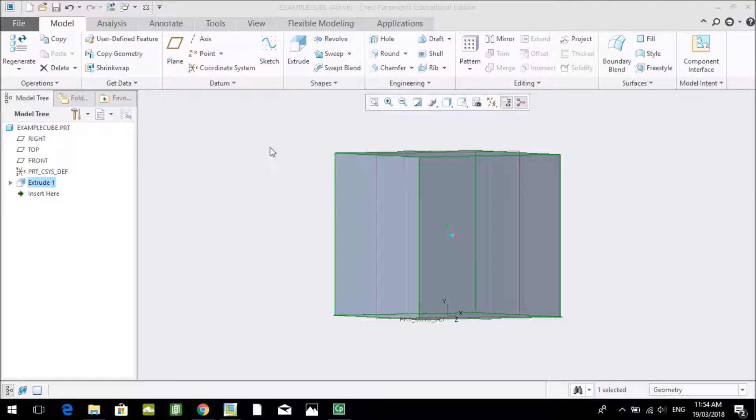To begin this activity, you'll first need to create a circular extrusion on the front side of your cube. To do this, simply click on the extrude tool and select the front face of your cube.

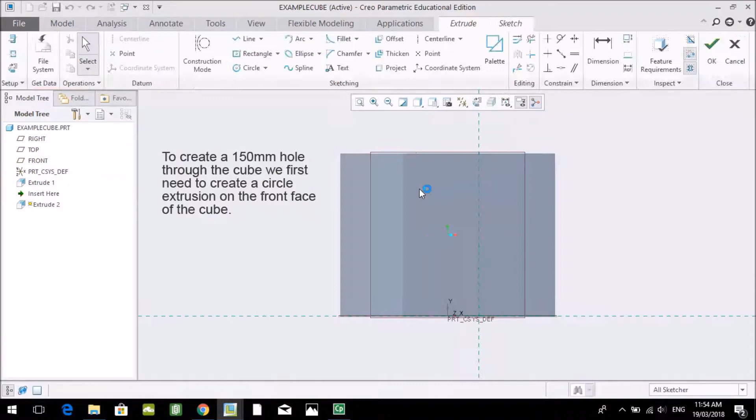We then need to create a circle extrusion on the front face of the cube. Click the circle command and the center circle option. Once selected, move the cursor to the center axis of the cube. Click and drag out a circle of any size.

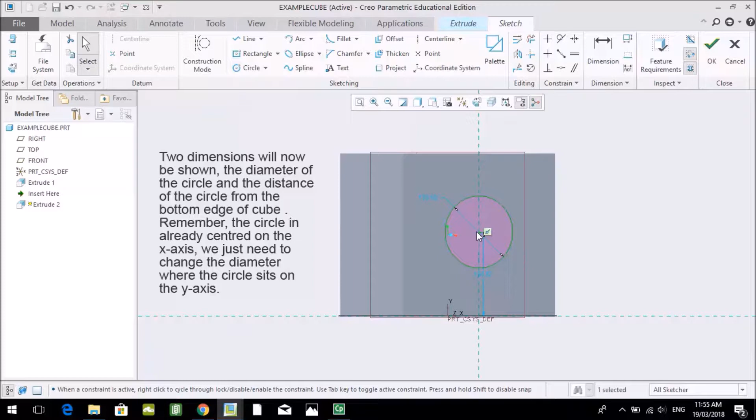Two dimensions will now be shown: the diameter of the circle and where the center of the circle sits on the y-axis. We change these by double-clicking on each and setting them to those specified in the activity. To center your circle on the y-axis, double-click on the dimension that dictates how far the center of the circle is from the bottom edge of the cube, and change this to half the height of the cube, or 150 millimeters. Once this action has been completed, click the OK command on the top right-hand side of the screen.

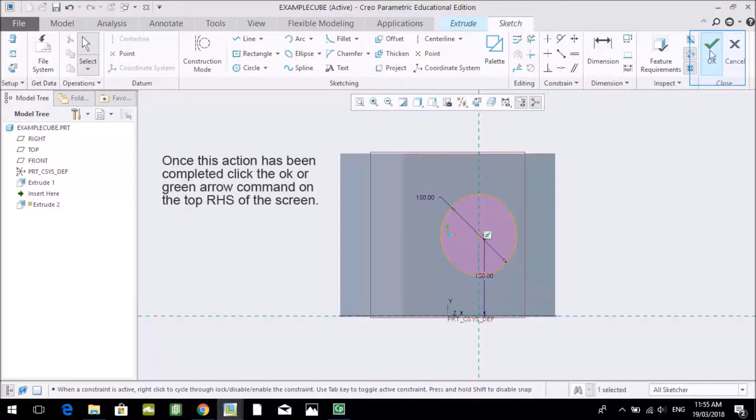A 150 millimeter circle will now be extruded on the face of our cube. We can manipulate this to create a hole through the cube. This can be done in a number of ways. By default, when we change the direction of the circle extrusion, it will remove the material from our cube.

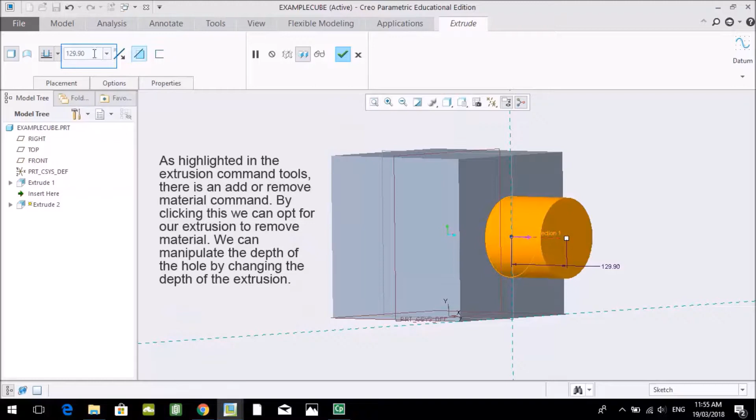We can also complete this action manually by increasing the extrusion to the depth of the cube and opting to remove the material. As highlighted in the extrusion command tools, there is an add or remove material command. By clicking this, we can opt for our extrusion to remove material.

Change the depth of the extrusion to the depth of the cube. Click on the Remove Material command and change the direction of the extrusion so the circle is extruded through the cube.

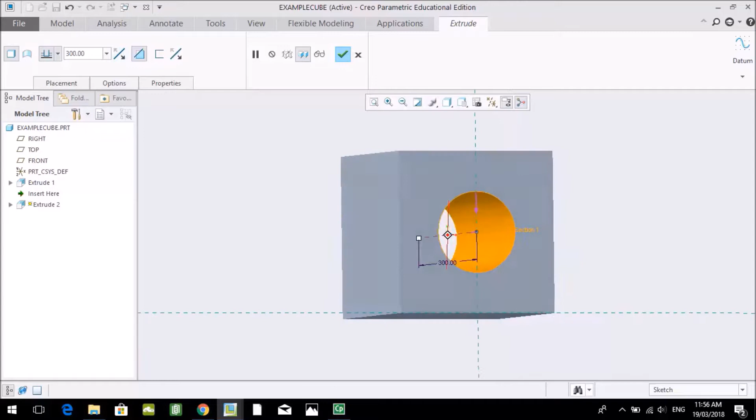Once this action has been completed, click OK or the green arrow to finish extruding a hole through the center of the cube.

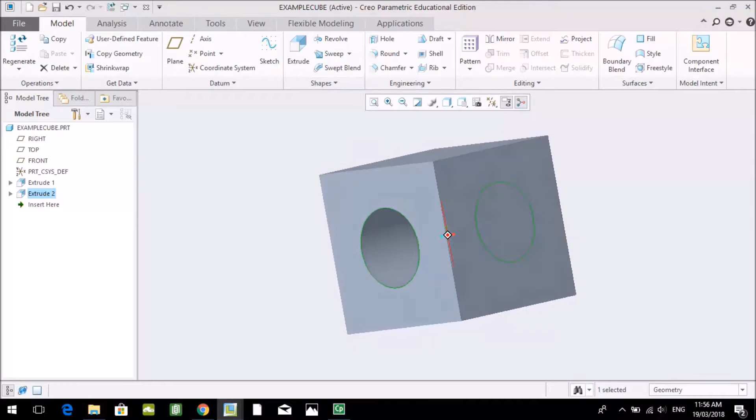We are now going to add a 3 mm roundover to the edges of the cube and a 3 mm chamfer to the hole within the cube.

To round over the edges of the cube, we first click the roundover tool in the commands bar. We then change the size of the roundover to the specified dimension in the activity, 3 mm.

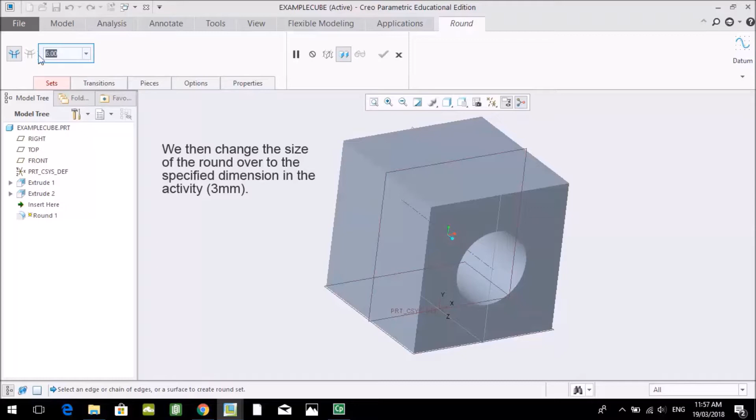Following this, we simply click each of the edges of the cube to round them over. Remember, to move around the object, we hold in the center wheel of the mouse and rotate the object into the desired view.

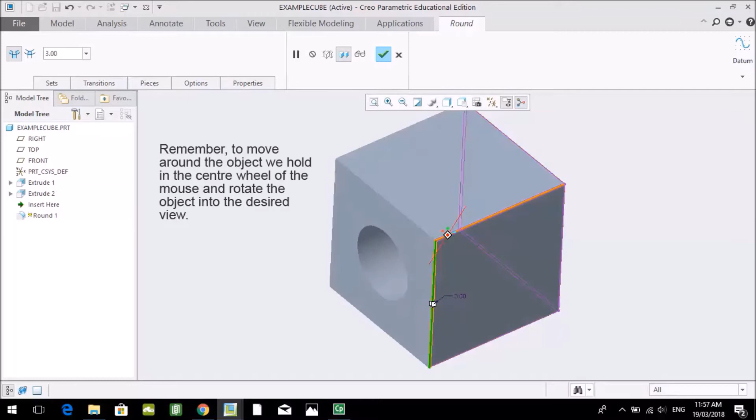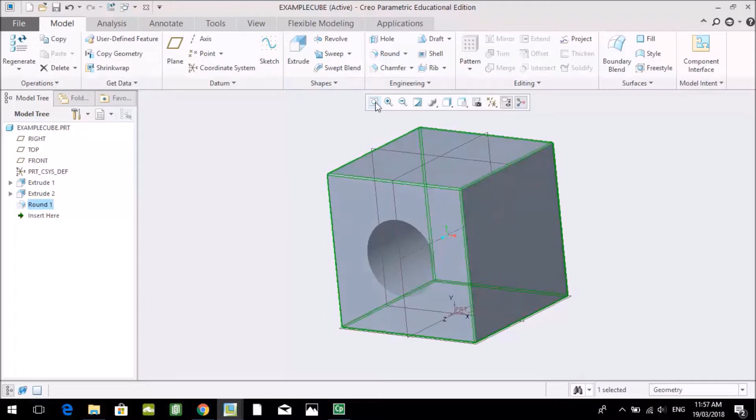Once all the edges have been rounded over, click the green arrow to finalize the edge rounds. When we zoom in, we can see each of the edges of the cube have been rounded over.

Our final stage in the activity is adding the chamfer to the edges of the hole in our cube. To do this, we first select the chamfer tool in the command menu.

Once selected, you will need to define the parameters of the chamfer in the command menu. Click the drop-down option, and for this activity, select D times D.

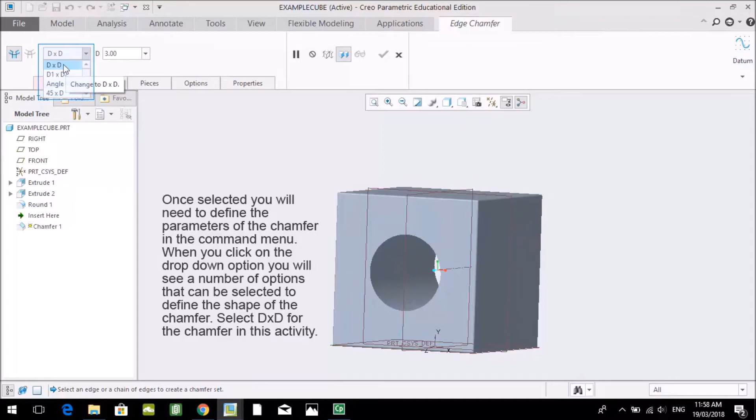To create a chamfer on the edge of the hole, simply click on the edges of the hole. Once this action has been completed, click the green arrow to finalize the chamfer.

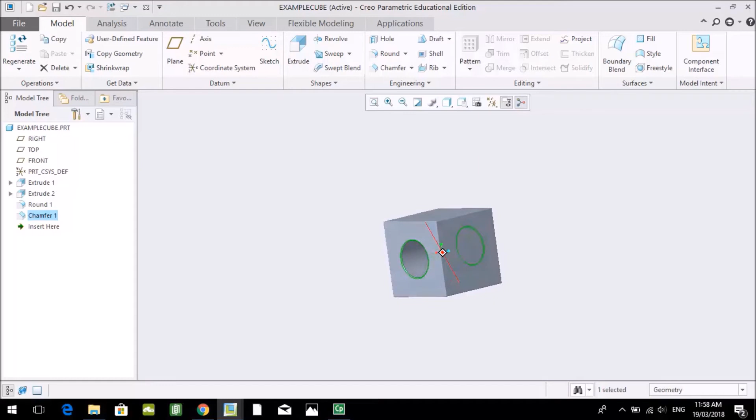Finally, save your model in a clearly labeled folder. This file will then need to be submitted to your teacher for feedback.